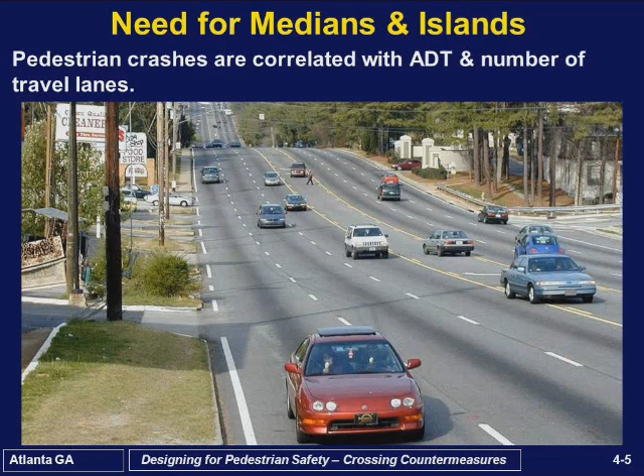When we talk about pedestrians crossing streets, one of the things that we know from the research is that pedestrian crashes are directly related to higher volumes of motor vehicle traffic and numbers of travel lanes. So the higher volume wide streets are the ones where we often find overrepresentation of pedestrian crashes, deaths, and injuries. So these are the kinds of roadways that lend themselves to really needing some effective solutions and treatments to improve safety.

So the definition of medians and median islands, essentially we're talking about a median as being an area in the middle of the roadway separating opposing lanes of traffic, excluding the turn lanes, and they can generally be either pavement marking only or what we call raised medians or islands that have curbing, and they do separate the movement of motor vehicle traffic. Refuge islands are generally shorter sections of medians.

They are referred to as center islands, refuge islands, pedestrian islands, median slow points. They have a variety of names. But generally, here we refer to raised islands that are placed in the middle of the street, so pedestrians have a place of refuge between opposing directions of motor vehicles.

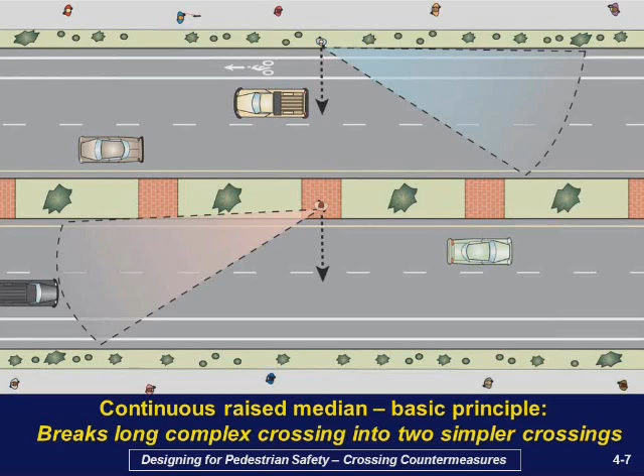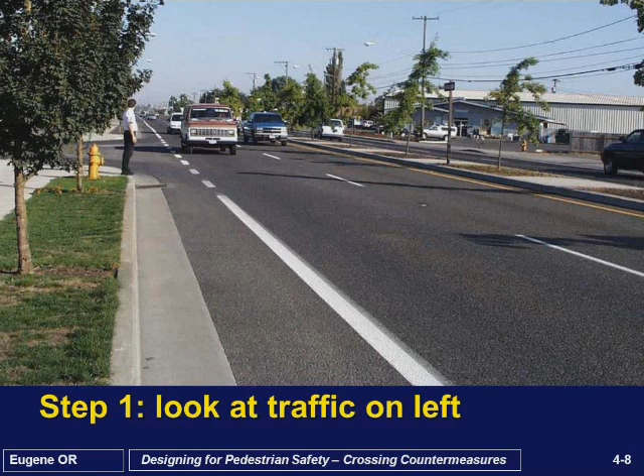So when you look at a complex crossing for a pedestrian, you have a multi-lane roadway. Here you have 4 lanes of traffic, 2 in each direction. Providing a median in the middle of the street sort of breaks up that crossing maneuver into 2 distinct crossings. So a pedestrian in this case would be able to negotiate each direction of traffic at a single time. So you can see here a pedestrian stopping at the curb would look to the left, wait for a gap in traffic or wait for traffic to yield.

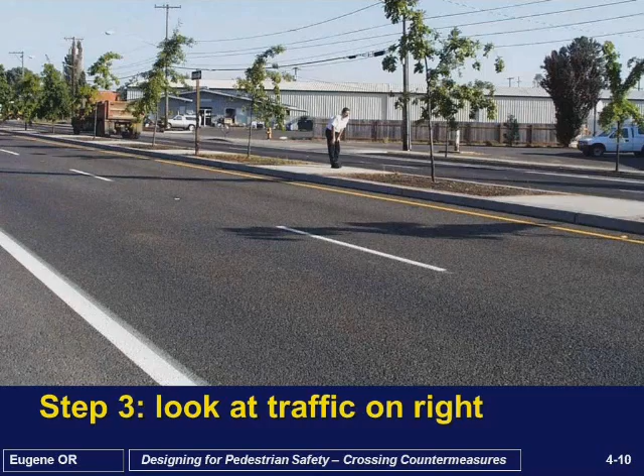The pedestrian would then cross to the first half of the street and then wait in the middle or in the median, in this case a raised median, to wait until it's safe to cross the second half of the street, and then the pedestrian completes the crossing. So when you have a section of roadway, a high volume multi-lane roadway where pedestrians are being struck or there's high risks, placing a raised median along that section really allows pedestrians to kind of figure out how to cross in a safer manner compared to only having a wide open roadway with no raised median.

There are several items of guidance that we have from the Federal Highway Administration on medians and median islands. And one of them says that medians should be considered on curbed sections of roadway, on multi-lane roads in urban and suburban areas, and they're particularly beneficial on roads with traffic volumes, average daily traffic, of about 12,000 vehicles a day or more, and or where the vehicle speeds are fairly high.

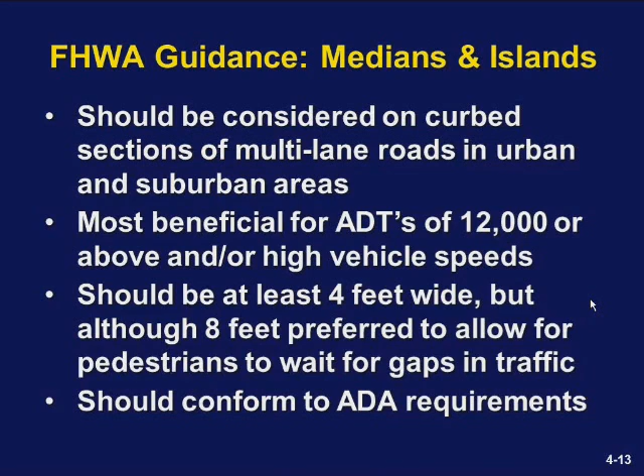Now, in terms of guidance for the width of raised medians, an absolute minimum of 4 feet, although FHWA guidance and also the AASHTO pedestrian guide recommend wider medians. 8 feet is preferred or wider. 6 feet is certainly better than 4, but we want to have enough room for several pedestrians to be waiting in the median or people in wheelchairs to have room so they're not sticking out in the travel lane. And the medians also need to conform to ADA requirements.

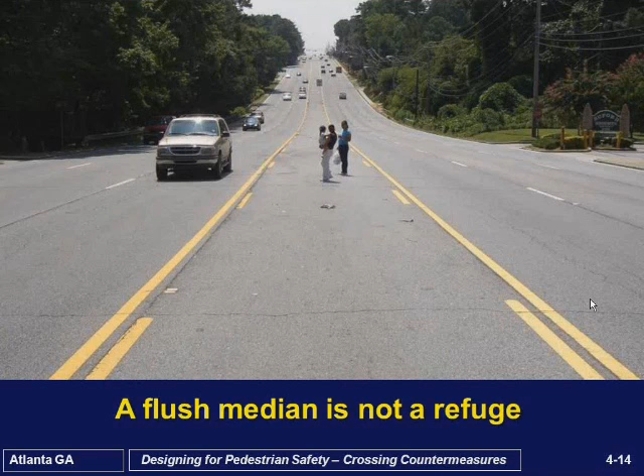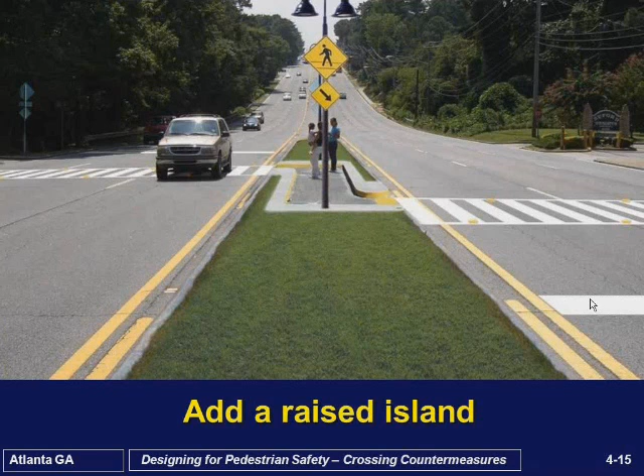Okay, so if we look at a roadway like this, in this case a 5-lane roadway, and pedestrians are trying to cross, and here several pedestrians are waiting in the middle of the street, this really does not provide them a very good place of refuge. That does not provide a protective area for pedestrians. So providing a raised median, like hopefully you can see now, is a much better alternative for them. And now this situation has added a marked crosswalk and an angled crossing. We're going to talk more about that in a minute.

And here you can see an illustration of that where they actually have a curb extension on each side of the street connecting a marked crosswalk, and then sort of an angled turn for the pedestrian in the middle of the street, and then they can complete their crossing. There's overhead lighting on this crossing as well.

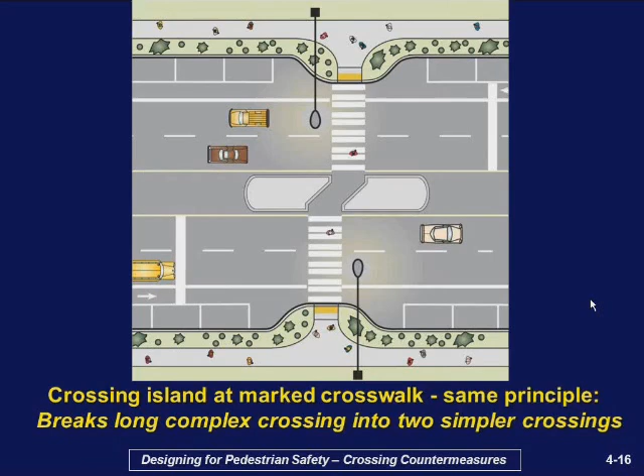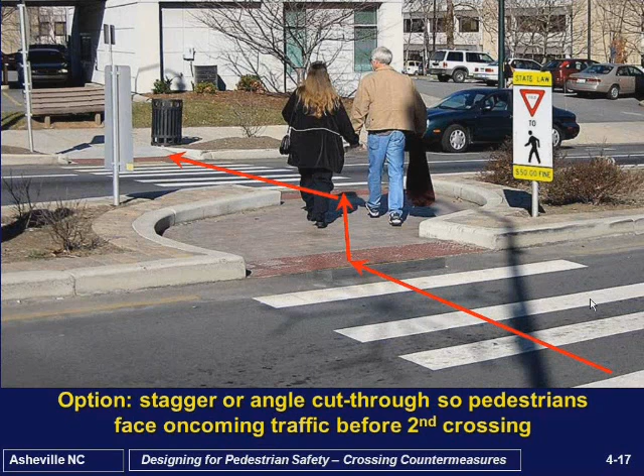Now, some agencies have started putting in kind of a stagger to the right, where they have a marked crosswalk and then a raised median with a little stagger to the right to allow pedestrians or encourage them to be looking for oncoming traffic from their right when they're in the middle of the street, to help reduce the chance of them stepping out into the path of an oncoming vehicle coming from the second half of the street.

So just to summarize very quickly, why do medians reduce pedestrian crashes? Because they break up a complex crossing on a multi-lane roadway into two simpler crossing steps. What's the crash reduction factor for adding raised medians? Most of you know what crash reduction factors are. That's basically the percentage of expected reduction in pedestrian crashes. So at a marked crosswalk, the CRF is about 46%. At an unmarked crosswalk, the CRF is about 39%.

Now there's something else we put up there called the CMF. That's the crash modification factor, and that's the terminology more recently used, like in the Highway Safety Manual. So if you're at a marked crosswalk, having pedestrian crashes along the route, and you add a raised median or median island, you might expect to reduce about 46% of the crashes, and the inverse of that is a CMF of 0.54. So it's just a different way of expressing the same information.

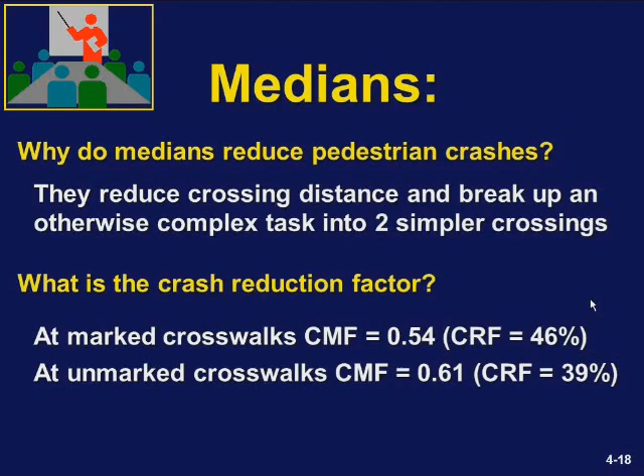Okay, so here's an example of the use of a raised median. This is along a suburban roadway in Bellevue, Washington, at a bus stop location. They have incorporated a raised median with a traffic signal, pedestrian signals, and a marked crosswalk. A pedestrian would push the button, and it would give traffic a red light coming from the pedestrian's left. The pedestrian would proceed to cross to the median while traffic is stopped to their left, and meanwhile traffic from the right continues to move forward.

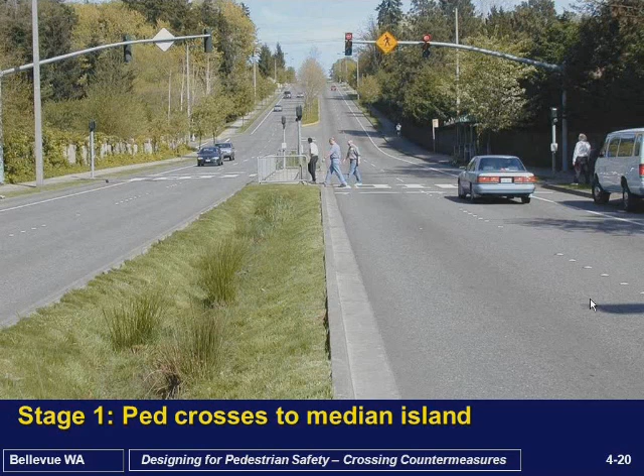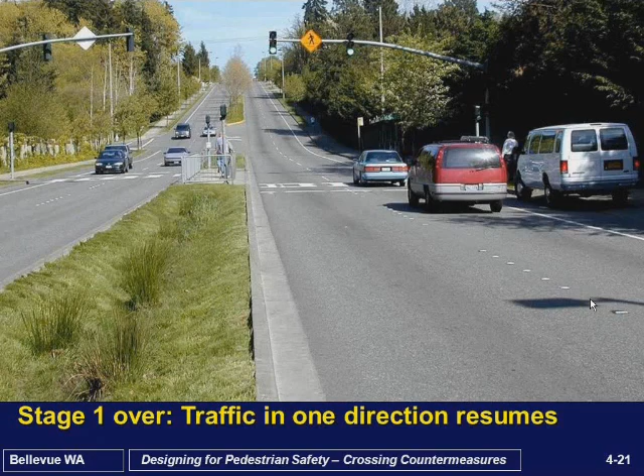The pedestrian would then be walking to the right to get to a push button in the median, and then traffic would be released in the first direction. You can see the green light there for motorists. Meanwhile, traffic coming from the second direction continues to flow until the pedestrian pushes the button right there at the end of their little walk area. Then traffic would stop coming from the pedestrian's right, and pedestrians can cross safely to the other side. So it really breaks up the crossing into two steps.

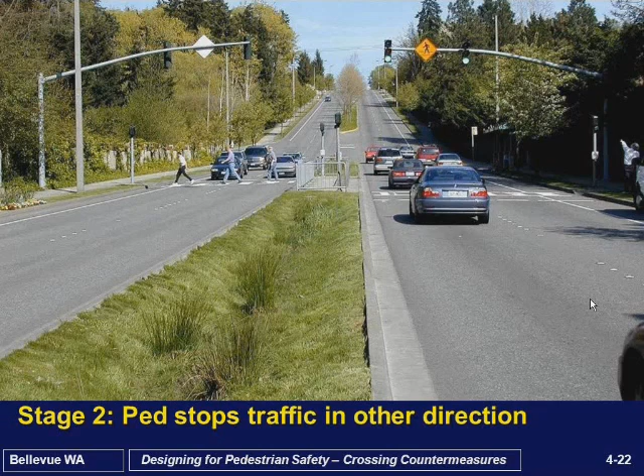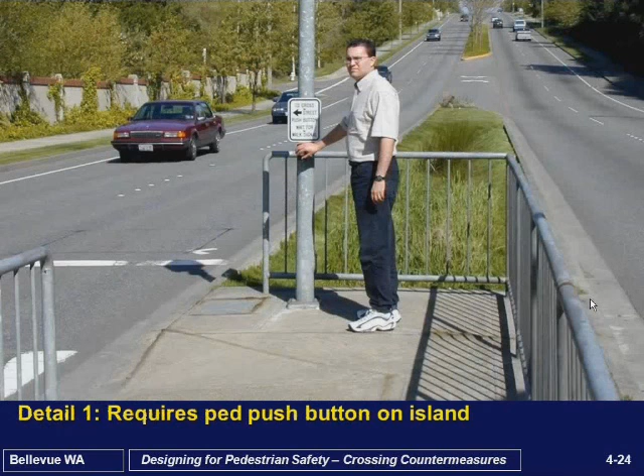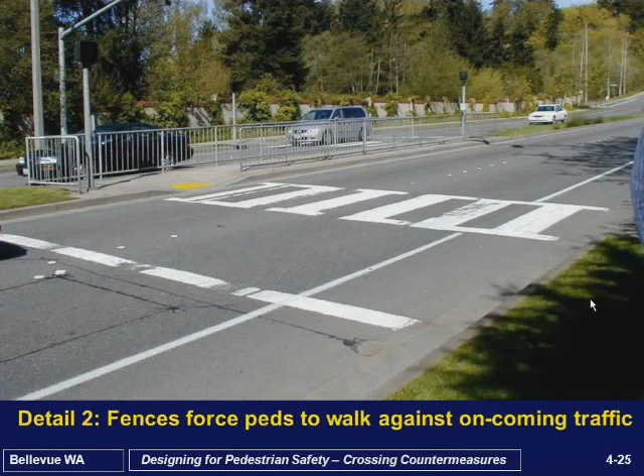It minimizes delay to motorists as well as pedestrian delay, and provides an area of refuge so pedestrians can make the maneuver, with the benefit of the traffic signal and pedestrian signals as well. Again, you can see traffic resumes in both directions. One important detail is that it requires a pedestrian push button at the end of the island, so pedestrians can activate the red light for motorists coming to their right. It also requires fencing, so pedestrians have an area to queue up in the median and walk to the right so they can see oncoming traffic and get to the push button to stop traffic in the second direction.

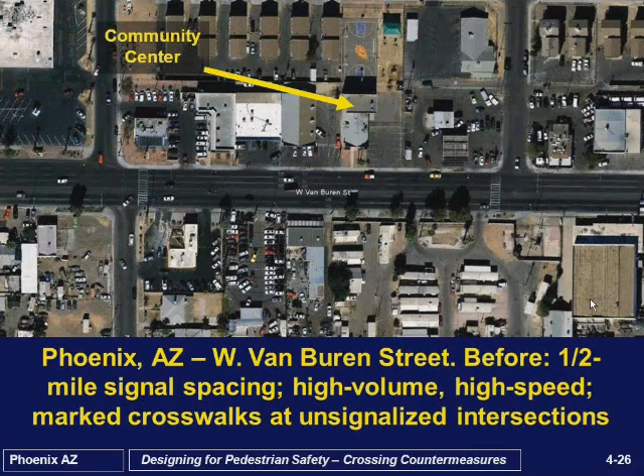I'm going to give you an example of one situation in Phoenix, Arizona, on West Van Buren Street. It was a long corridor with traffic signals spaced about a half mile apart. Pedestrians were being struck crossing the street here. It's a 6-lane roadway, high volume, high speed. There was a marked crosswalk at an unsignalized location. You can see it's just no frills, just paint on the road, a ladder-style crosswalk. It's at an intersection, and pedestrians were having difficulty crossing the street, as you might imagine.

You can look at this illustration of what the pedestrian would see crossing over to a community center, crossing 6 lanes of traffic. So the engineers here decided to implement a combination of treatments. Here you can see a raised median island with high visibility marked crosswalks, and the stagger built into the median itself with the fencing, just like we showed you in the other illustration. So this is the after condition they built to help pedestrians get more safely across the street.

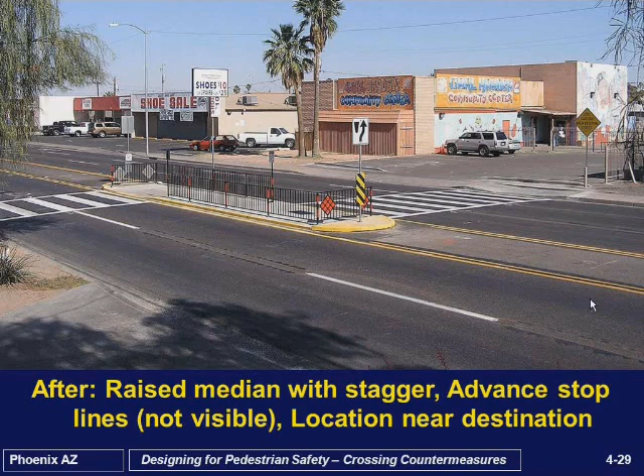Okay, now just to summarize some of the things that we know about median islands from the research and other guidelines is they can result in pedestrian crashes being reduced by 39 to 46% roughly. They tend to decrease pedestrian delay by up to 30%, but they can increase motorist delay in situations where you have an extended median and motorists have to make additional turns to get into the side streets or driveways. So I'm not going to get too much into that, but there is somewhat of a balance. We want to, again, focus on overall safety.

And I will say that in addition to reducing pedestrian crashes, some studies have also showed that having a divided roadway, like with raised median islands, results in an overall reduction in total vehicle crashes compared to undivided roadways. So we know that raised medians in particular can benefit safety for essentially all road users, motorists as well as pedestrians. And we know that raised medians can enhance visibility of pedestrians because they have a place to stand in the street and they can more easily see motorists coming in the second direction. Motorists can more easily see them.

They can reduce vehicle speeds on certain routes and do provide access management. We're not going to get into it in this presentation, but also in terms of reducing crashes involving driveways, the raised medians can help there. And they also provide space for signing that's appropriate for the roadway itself.

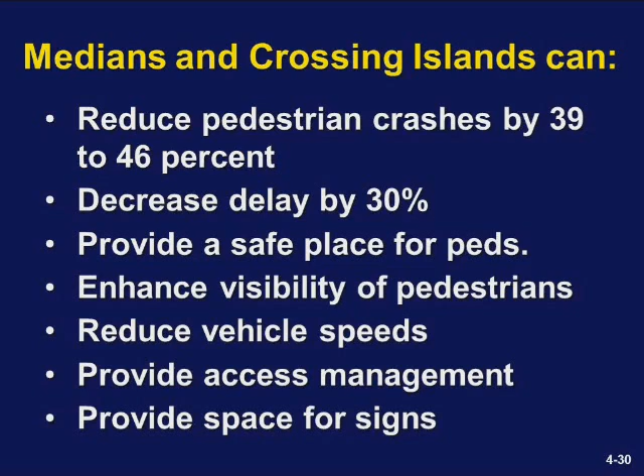Good morning. This is Sheila Lyons. I'm with the Oregon Department of Transportation. I manage the Pedestrian and Bicycle Program, and we have taken Dr. Zegeer's research and run with it, and to great effect. And I'm going to talk about mainly two types of pedestrian islands that we use: pedestrian crossing islands and pork chop islands. And I'm going to start with pedestrian crossing islands.

This is the study that I think kind of started looking at how pedestrians cross the street. It was published in 2005, and it's been a really great resource on basically what are the effects of marking a crosswalk, and when should you consider other measures, or maybe not marking the crosswalk at all. And a little bit of this is a repeat because, of course, Dr. Zegeer is the one that did the research and he just gave the prior presentation. But the correlate with crashes is the motor vehicle traffic volume, represented by the average daily traffic, which is what ADT means, and the number of travel lanes. And this has been confirmed by the observations we've made in Oregon on our state highways.

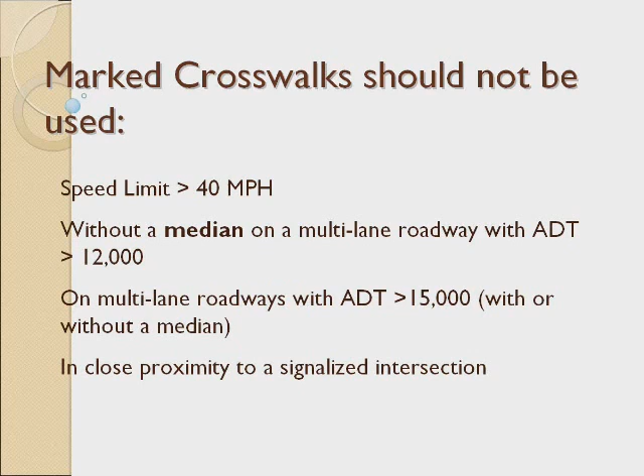So the guidance is that a marked crosswalk should not be used above a 40-mile-per-hour speed limit, without a median on a multi-lane roadway with ADTs above 12,000, or on multi-lane roadways with ADTs above 15,000, regardless of the other amenities that you have. And then, of course, you don't want to put them in close proximity to a signalized intersection, because you would want to direct the pedestrian to the signalized intersection.

The following treatments are recommended: median islands on multi-lane roads. Of course, if you have ped volumes that warrant a traffic signal or another type of pedestrian hybrid beacon or rectangular rapid flashing beacon. Crossing median islands reduce the crossing exposure. Curb extensions are another method to reduce the crossing width. And then, of course, you can also look at your roadway design. Often streets were just striped out for however many travel lanes fit in the physical space without much consideration for other modes of traffic, and there's a lot of opportunity to restripe for fewer numbers of travel lanes.

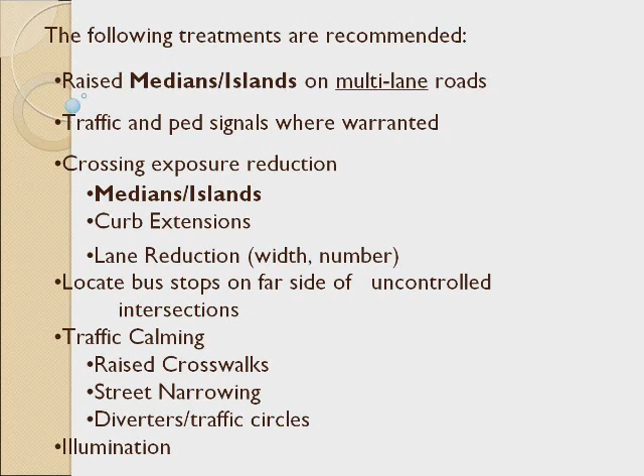We like to locate the crossings with bus stops, and preferably on the far side of an uncontrolled intersection. And then there are other types of traffic calming measures like raised crosswalks, street narrowing, diverters, and illumination. And this is all the recommendations out of Dr. Zegeer's 2005 report. So the message here is that medians are the message, and that they reduce crash risk significantly, particularly on higher volume roadways, higher ADT roadways, and of course it needs to be a raised median.

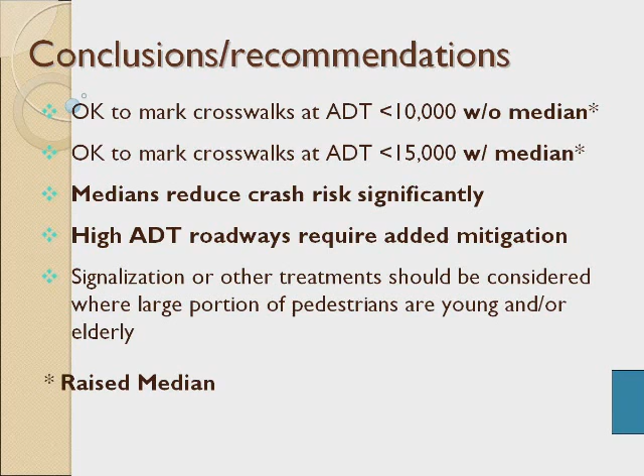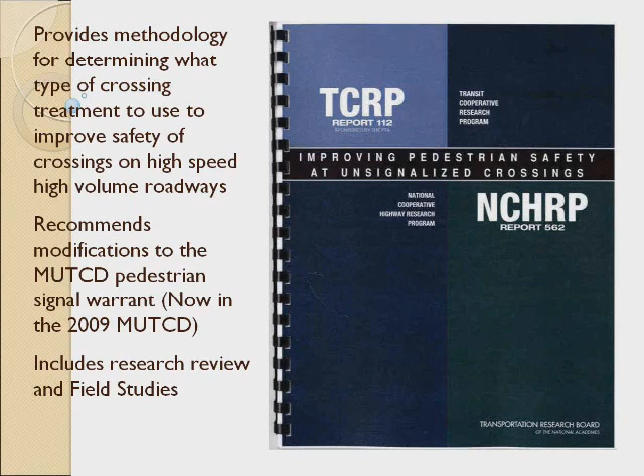So we use the 2005 Zegeer report in conjunction with this report, which I like to refer to as NCHRP 562, which basically looked at what kind of stopping compliance you get at different types of crossing amenities. And they studied everything from just the median alone to various flashing signal treatments. And this report is a little bit technical. It's not been really translated into English so much. You have to read between the lines, but you can kind of ferret out whether you need a red signal indication or a yellow signal indication. So we've taken all this research and we've adopted it into our traffic manual.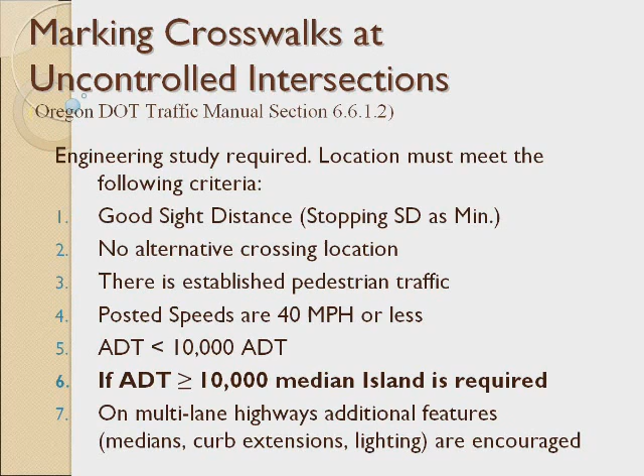And this is the guidance from the Oregon Traffic Manual. You'll see that we basically have some common sense approaches plus the Zegeer research, which says that if you want a marked crosswalk at an uncontrolled location, you have to have posted speeds less than 40 miles per hour. We've ratcheted down the research a little bit to 10,000 ADT. And if it's above 10,000 ADT, then we require a median because that is the safety feature. And we found that there's a lot of benefits to that.

So we also have adopted a very similar approach to mid-block locations. And contrary to, I think, popular belief that crossing mid-block is problematic, we've found that it actually can be an easier crossing maneuver for pedestrians. And sometimes you can get a better crossing if you look at a mid-block location.

In Oregon, we do not have a jaywalking law, so it is legal to cross mid-block. If it's a marked crosswalk, then the motor vehicle driver yields to the pedestrian. If it's an unmarked crosswalk or an unmarked crossing, then the pedestrian must yield to motor vehicle traffic, but there is no restriction on where the pedestrian can cross. And we've been having some good success with mid-block locations.

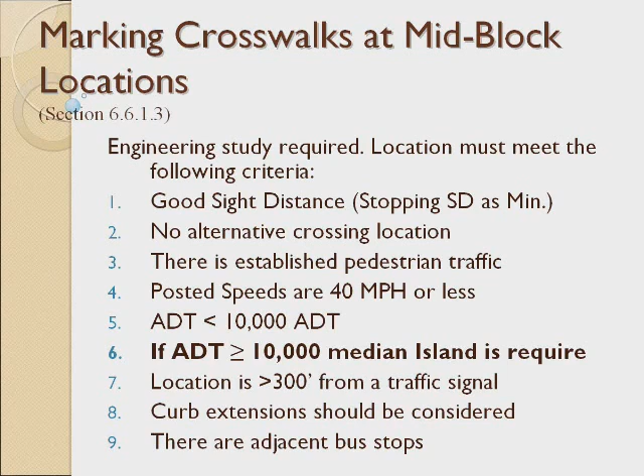So when you do a good enhanced pedestrian crossing, it is an opportunity to concentrate. In a corridor where you have diffuse pedestrian generators, you can't tell where the pedestrian is going to cross. You provide a good pedestrian crossing and pedestrians will be attracted to it, and you'll get the vast majority of your crossings happening at that location. And then you have to look at other things like free turn movements on and off the roadway and other traffic characteristics that might make crossing problematic for pedestrians.

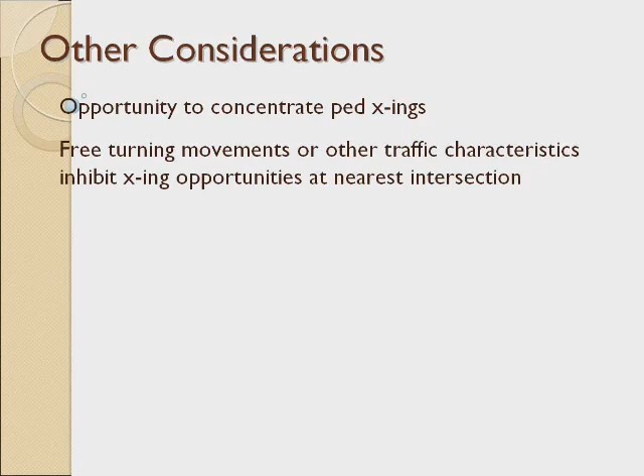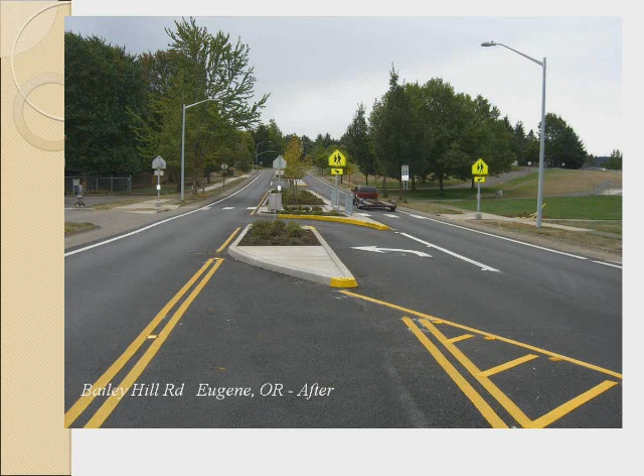And then we also have examples on just rural 2-lane roadways. This was 2 lanes with a 2-way center turn lane, and we used that opportunity there to put in a median island. Again, this one has flasher treatments, but really it's the median that is the safety feature. So that is the condition.

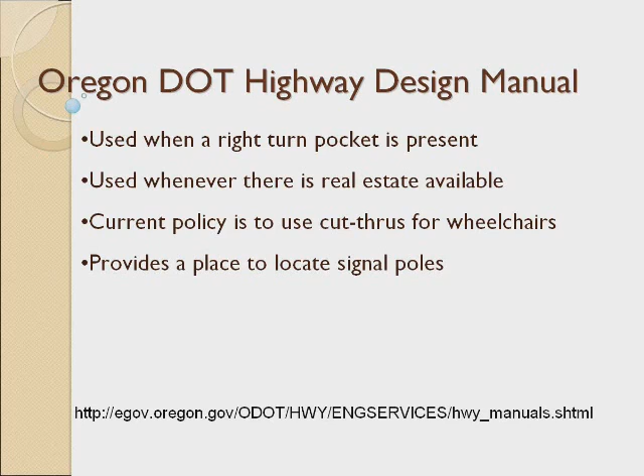We also use pork chop islands. We use them mainly when a right turn pocket is present. Wherever there's real estate available, we use cut-throughs for wheelchairs. And it turns out that we have a lot of support from the signal folks because it's good real estate for them to place their signal poles, and it makes for shorter mast arms and better signal pole placement.

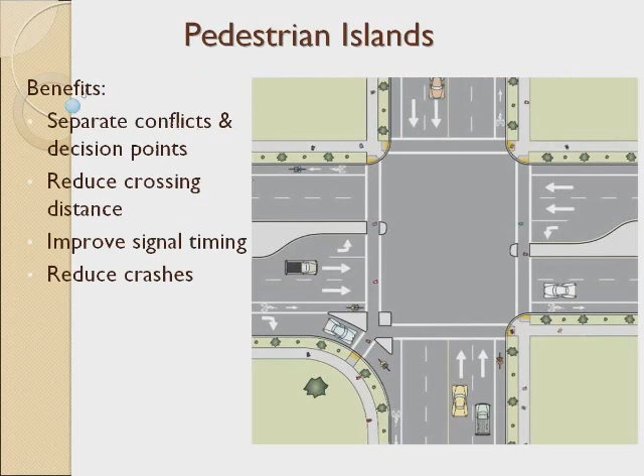Again, it separates the conflicts, it reduces the crossing distance, it improves the signal timing, and does reduce crashes at pork chop islands. And you can imagine what some of the signal timing would have to be like without that. How long would these pedestrian crossings be? How long would the pedestrian phase be? There would be quite a bit of delay for the motor vehicle traffic as well.

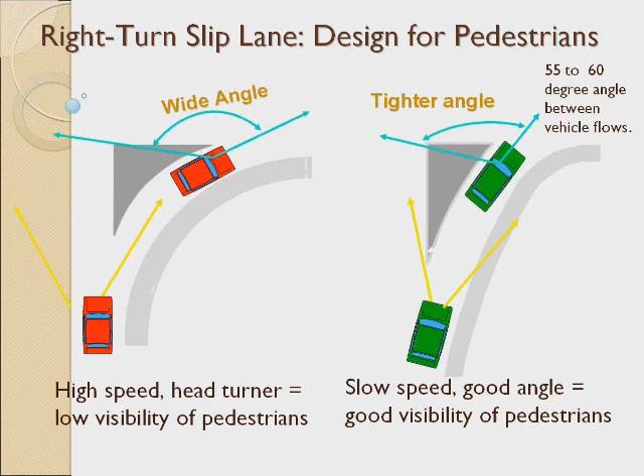Design is important. You want to create as much of a 90-degree angle as you can, or get as close to that. You can't get a 90-degree angle, but you want to have a less acute angle so that you line up the motor vehicle driver to not have to turn all the way around behind them to merge into traffic. It also improves their visibility of the pedestrian crossing.

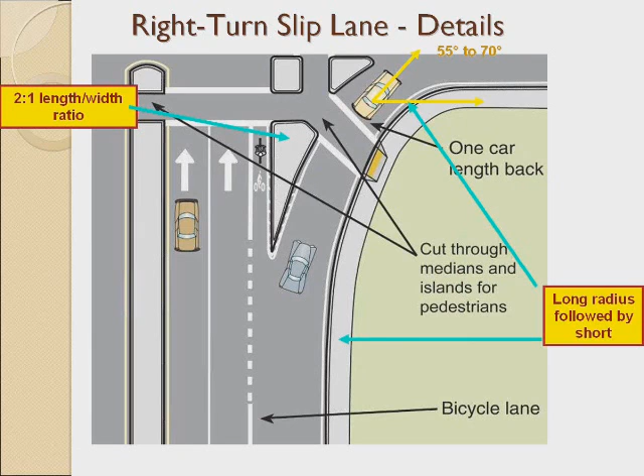We like to make them 2 times the width. The length should be 2 times the width, and we use cut-throughs for wheelchair access. And then if you just, on a snowy day, go out and look, you can see that these pork chop islands just present themselves. And notice that the design is exactly as I've described. It's about 2 times long.

The length is 2 times the width. It's kind of a natural bit of real estate that's available for a median island. You don't get a lot of pushback from the roadway designers for them. So then the question becomes, should you mark the crosswalk?

If you place a pork chop island, that's an opportunity to not signalize the right turn movement. You can have a right turn lane without signalization. And it's not a burden on pedestrians to cross that because the sight lines are good, motor vehicles can see the pedestrian, and the question is, should you mark it? The MUTCD does advise marking it. So in Oregon, we tend to interpret this as an opportunity to mark it, and we tend to mark it.

And then here's some examples. This is in Bend, Oregon, and it's an opportunity, you can put landscaping. They chose rocks here. Notice we have a cut-through. We have a ped push button available on the island. The crossing of the right turn lane is not signalized, but once you get to the pork chop, you have to activate the pedestrian walk phase. And then wheelchair access is facilitated with cut-throughs.

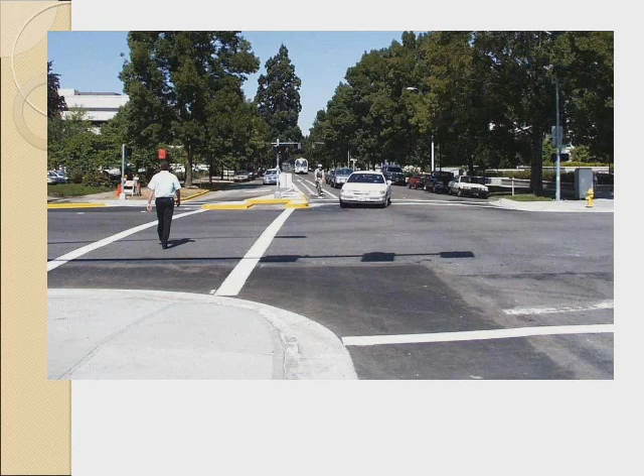And then again, it just provides crossing assistance to people of all stripes. And this is the end of my presentation, and that's the world's tallest man on a bicycle.

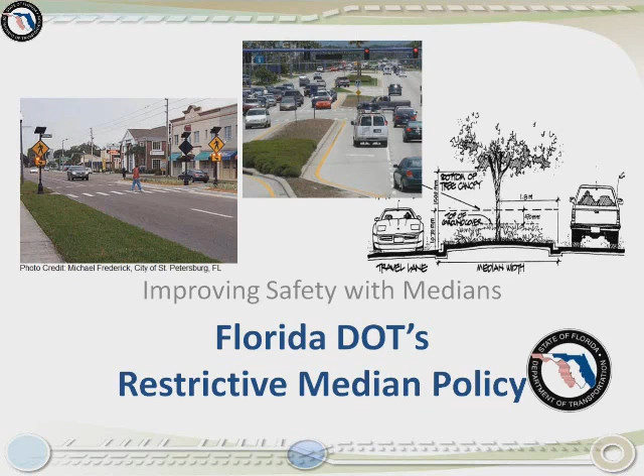So in 1993, our design section created a policy that essentially said any new multi-lane project with a design speed over 40 miles per hour will be designed to have a restrictive median. And just as importantly, in my opinion, the second part of the policy was that it would encourage the use of small restrictive medians like the kinds that you've seen already from the first two presentations, even where we do have, let's say, a five-lane design type thing. So that is what has been in place since 1993.

It has now been moved into our standard plans preparation manual. At the end of the presentation, almost everything that I mentioned will have a hot link to it, and so there you see what the median policy is.

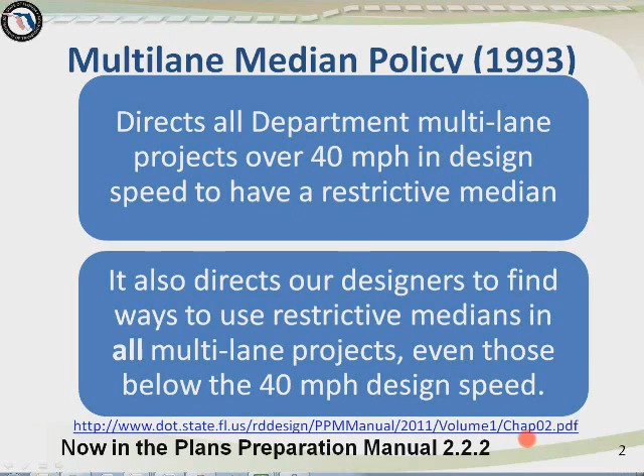So what led to our policy? A number of studies and past work has shown that wherever restrictive medians have been put in, the crash rate goes down. And what I'm going to be speaking of generally will be automobile vehicle crash rates.

Back in 1993, the University of Florida did this study comparing urban multi-lane highways. So we would compare the same kinds of highways only during the day, and found a significant decrease in the crash rate between the center turn lane versus those with the raised median.

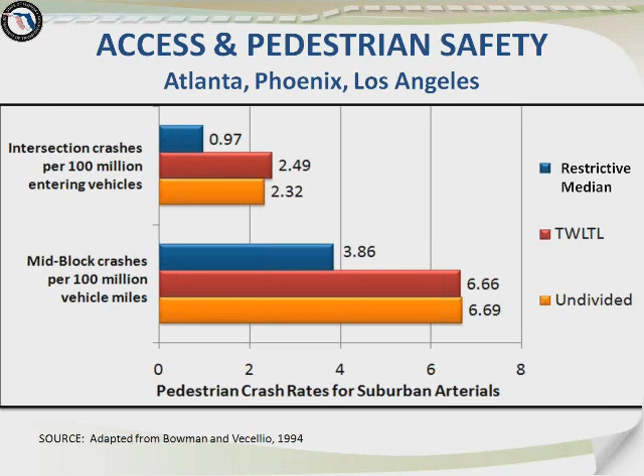Here in Tallahassee, also probably back in the year 2002, the city traffic engineer, Debbie Danton, really had a great effort to try and put restrictive median in on Apalachee Parkway. And she used a series of photos taken from a light pole to show the city council people some of the issues here. And you can see this is pretty scary.

And the thing that I think we talked about earlier is how the median is the safety feature. And one of the reasons it is the safety feature is not just because it's big, and not just because it's off the ground, but because of its size. It is visible to the driver, whereas a pedestrian is invisible to, let's just say, 10% of these people.

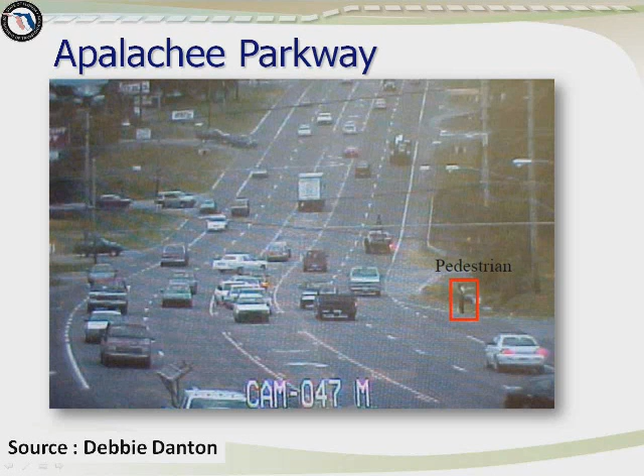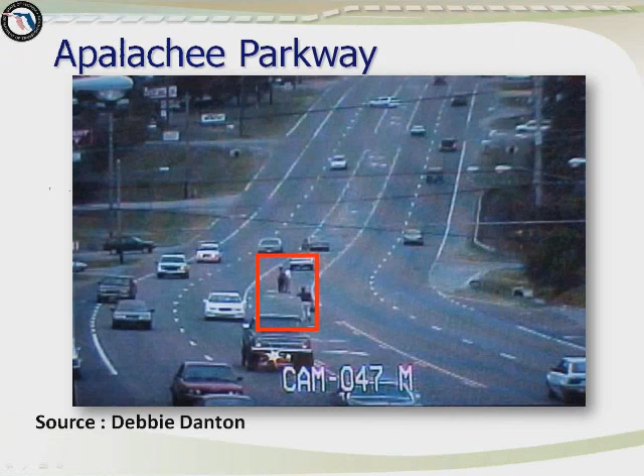And this is a place where there were a number of pedestrian crashes, so people on our commission in the city could say, well, yeah, I know what it's like over there, and it really helped. So you see the series of photos really helped convince our leaders to put a median in. And there's what it looks like today. That was back in 2002, and now this is what it looks like today.

So what was interesting to me is that our Secretary of Transportation has come to our section frequently to say, look, I get a lot of complaints from businesses when we put in medians, and I try to explain that this is for safety purposes. And as a matter of fact, from our Secretary's office, you can see Apalachee Parkway. He knew that we were working on a study of these kinds of roadways and asked if we could speed up the portion on Apalachee Parkway so he could have the data in his office, where he sometimes gets these complaints from some of the business interests.

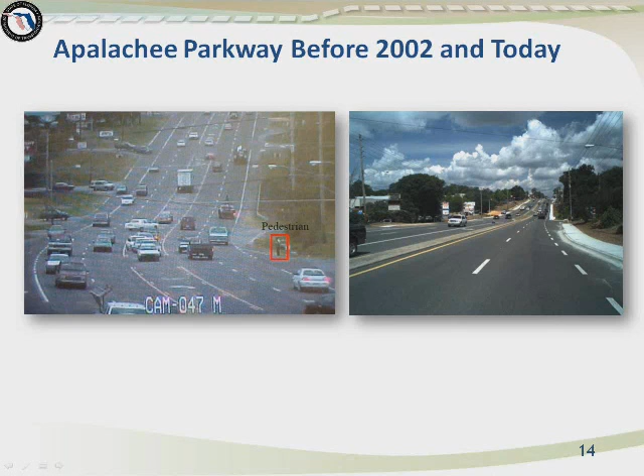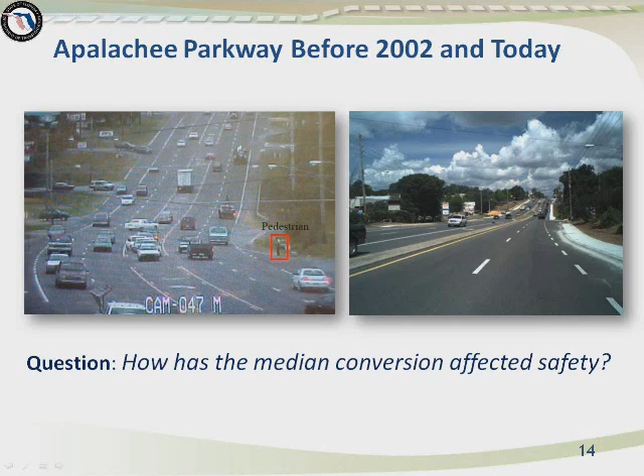So we've been working with Florida International University in South Florida to see the difference in our multi-lane highways where we actually put a median in, before and after studies all over the state. So the first thing we did was Apalachee Parkway, and this is what we found. This is 1983 to 2010. You see a big drop in 1991. We found out that had something to do more with the crash reporting standards, which became more stringent. In other words, it had to be property damage over a certain amount or bodily injury.

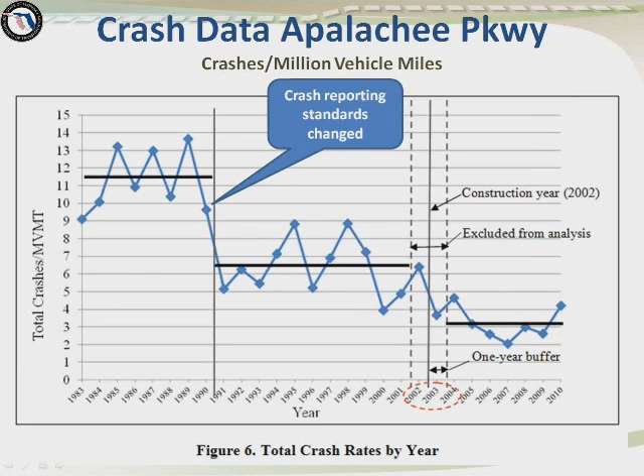This is the period of construction, 2002 to 2004, and you can see the drop that has happened, and it is because of the median, because certain other crashes, wet crashes and nighttime crashes, had been removed, so we could try to get a better indication of what caused the decrease in the crash rate. Again, speaking about vehicle crashes. Okay, this is just a blow-up of that.

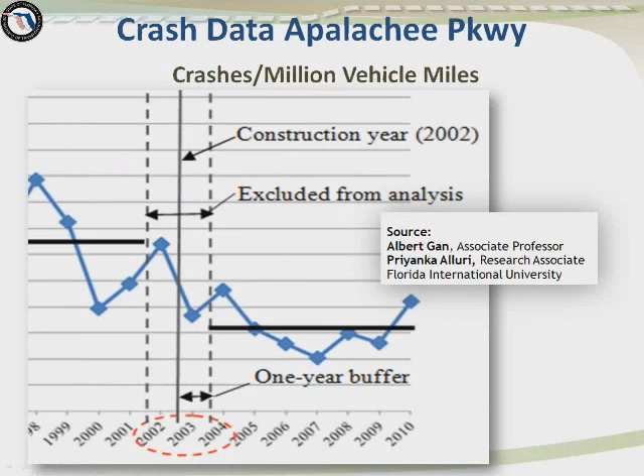Now, those of you that have started working with the Highway Safety Manual understand that medians are one of the most effective ways to increase safety. And so how come we're not building more of them? Well, controversies with existing businesses is a big issue and something that has to be dealt with. And there seems to be a real resistance to U-turns. Okay?

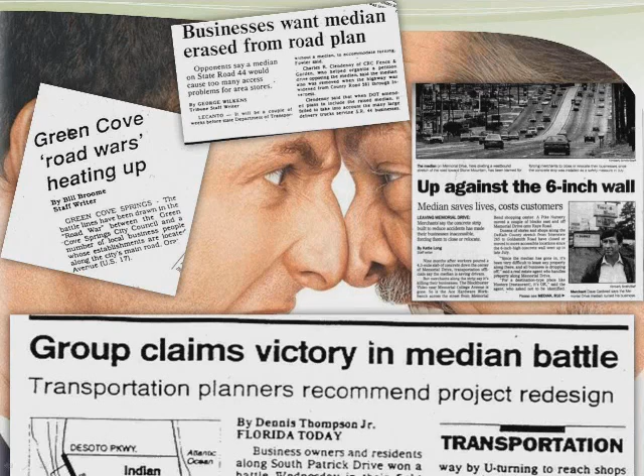Just because you have the right to put a median down a roadway, and just because it's the right thing to do, you cannot just act like it. You really need to be very sensitive, and you really need to do your work in order to become successful. So what we've done in the past few years is we've really worked on our materials that we have on public relations, and we've also worked significantly on the issues of things like U-turns. And I'll get more into that later.

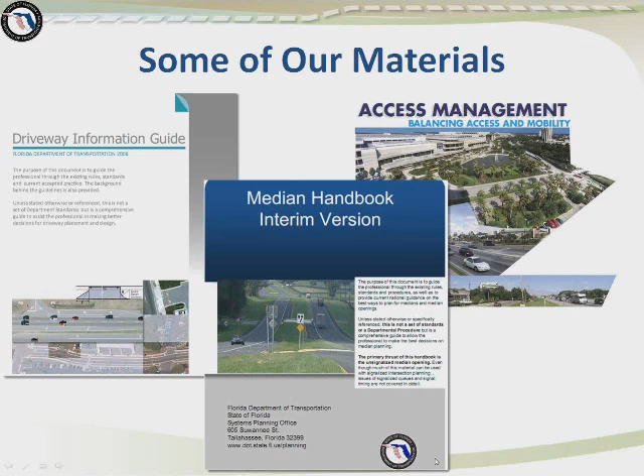So in addition to some of the materials that we have for the public, we've also created materials for our own professionals. Traffic engineers and transportation professionals usually become specialists at something, and many times are thrust into defending decisions that were made by specialists of another field. So we tried to put out documents and training that help the non-specialist professional understand the principles behind good access management and good median design. And that's why we have created the median handbook and the driveway information guide.

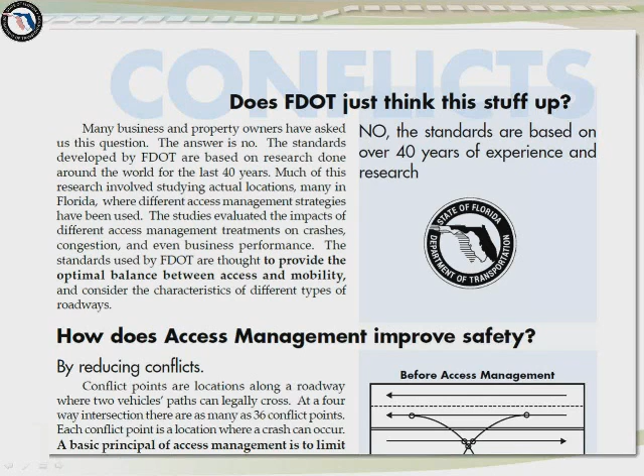This is just one of the pages of one of the pamphlets that we put together. It's a question and answer. We did it specifically from the standpoint of the businesses, and we know what kind of questions they ask because we've had a lot of experience. In our years of working, we understand what it's like to go against a hostile audience. And they have a lot of fears. Most people fear when things change, especially if they've put their lives into their businesses, and we understand that.

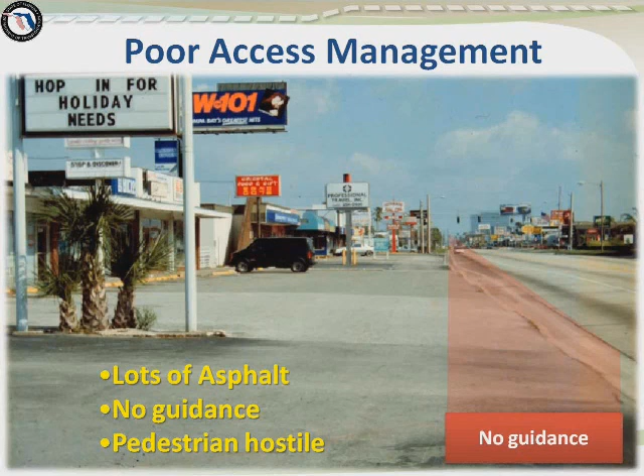Is it in a place like this with no access management, or is it a place like this, like US 192? This is near the entrance of Disney, and you should have seen what it looked like before. And from the state of business, this is a much better location to have a business.

As I said before, U-turns are just a subject that comes up every time. And we talked about it earlier, I believe, in the first presentation, where Charlie mentioned that some of the increased travel time can be traced back to these U-turns, and we've actually found that it's not so.

Yeah, it increases the travel times for those people who would desire to turn left, but the effectiveness and the safety of the bulk of the people either crossing the street or going on foot or going straight through, it really doesn't cause much of a problem.

So we had the University of South Florida in Tampa do a study that had never been done before. We wanted to know what the differences were between the movement of the direct left versus when the driver needs to make a right-hand turn followed by a U-turn to get to the same place.

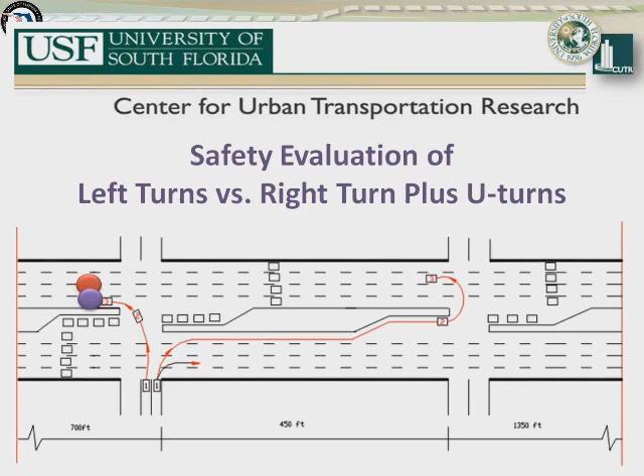And the only way to do that was by the use of video cameras placed through the entire area, and then to evaluate the data for conflicts and evasive maneuvers. So instead of waiting for crashes to happen and having to look at the crashes in the reports, what we did is on 8 corridors, we had over 300 hours of video. And we measured the evasive maneuvers.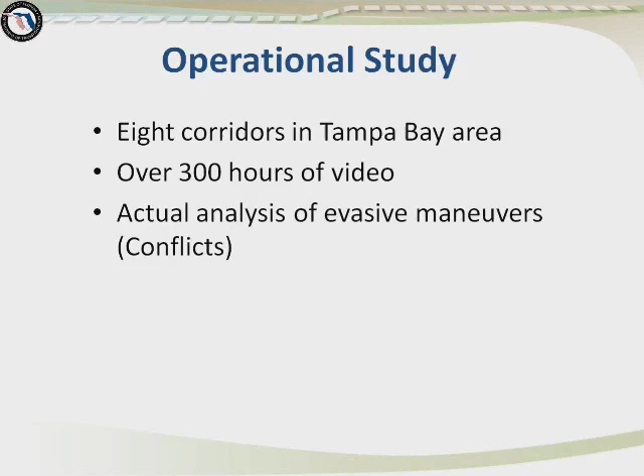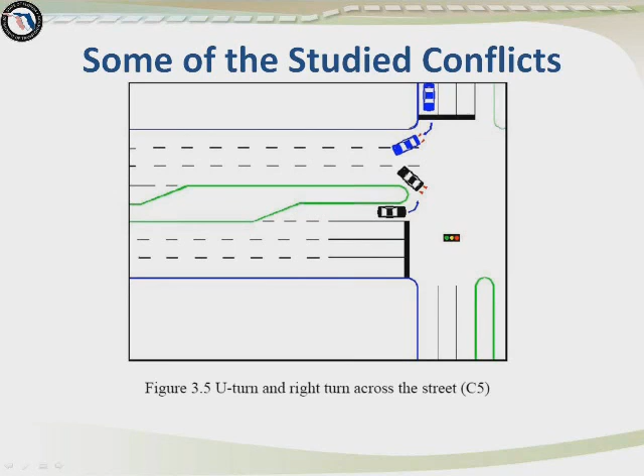Again, this is just vehicular. This is not pedestrian. And these are some of the conflicts that were studied. So, I mean, there are conflicts with U-turns. We're not just saying that they don't happen. This is a U-turn, right turn conflict, and you know that when you make a U-turn, there's sometimes a conflict with people turning right at that intersection.

Okay, but the thing to remember most of all is that the left turn out is the most dangerous of the low-speed arterial driving maneuvers you can make. And this is what we're trying to control for as much as possible. And when you do this, and you provide medians and provide well-designed directional median openings, you also improve the environment dramatically for pedestrians.

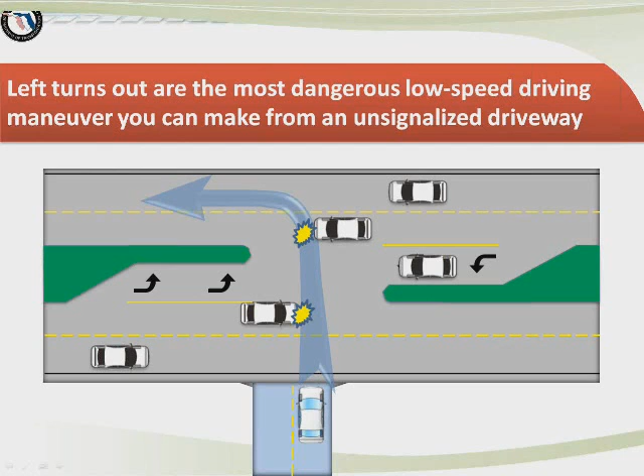So the left turn out has the problem of exposing that left turn out driver to the most dangerous crash, and that is the right angle collision. And you can see right here, the through vehicle is directly hitting a person in a car.

And that is why the right angle collision, especially of people turning out left because of their lack of visibility or the fact that somebody's behind them and making them go for a gap that they shouldn't go for, you put that all together, this is the highest potential for physical injury of a person in a vehicle, let alone a person crossing the roadway.

So we know that the pedestrian is the most vulnerable and that we need to consider them heavily in the design of these medians. Now, the work that was done by the University of South Florida showed, when they looked at the evasive maneuvers, that even though the right turn followed by the U-turn traveled a greater distance, the conflicts per thousand involved vehicles went down dramatically.

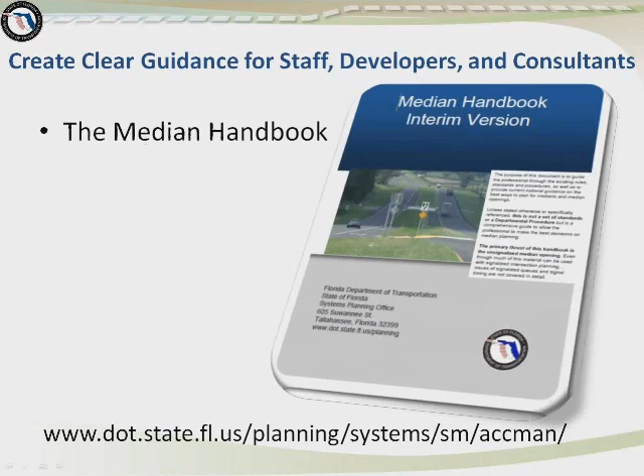Okay, so some of the things that we've dealt with to try to have a success here is to create handbooks, like we said, to create training, and every district has an access management review committee to deal with controversies as they come up, and there are plenty of them. This is the median handbook, which helps us determine where median openings go. And as you can see, safety, as put forth by everybody today, the median is the most important safety aspect of this access management design.

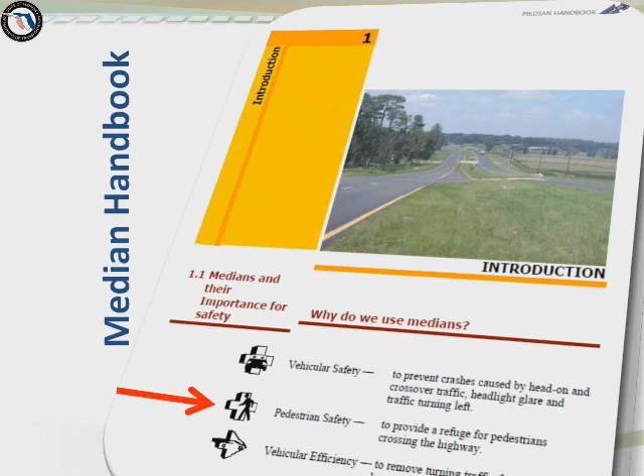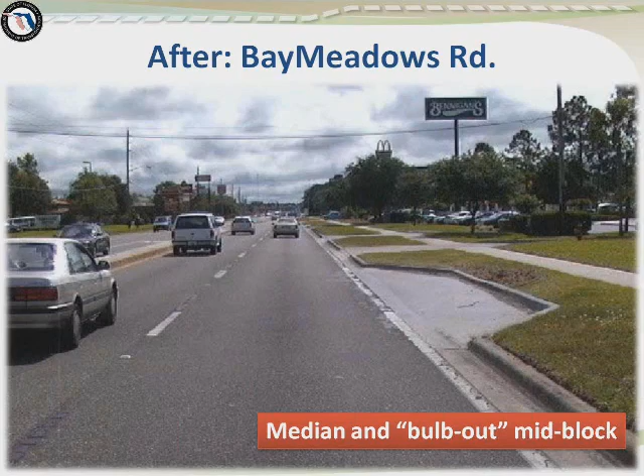Okay, we even have an entire chapter on U-turns because of what a hard sell it can be sometimes, and these are just some locations where we've had to address the extra space needed for U-turns. I've said some of these things earlier.

The concentration on these medians is safety, and even though you have the authority, don't act like you have that authority. Do be sensitive to the businesses, work with them. They actually can be good allies if you work with them. And also, if you have not already done all this, you will find people in your own agencies that are already doing good work in the field of access management and medians.

Now, as I've told you, we do come under a lot of pressure from some interests who are afraid of what the median is going to do. And as I was going through my files about a year ago, I came across an article that the Orlando Sentinel did back in 2004 that I had almost forgotten about. This is on State Road 50 through the city of Orlando and the Orlando area. The Orlando Sentinel did this article on what they considered the deadliest stretch of road in the Orlando area, which was State Road 50.

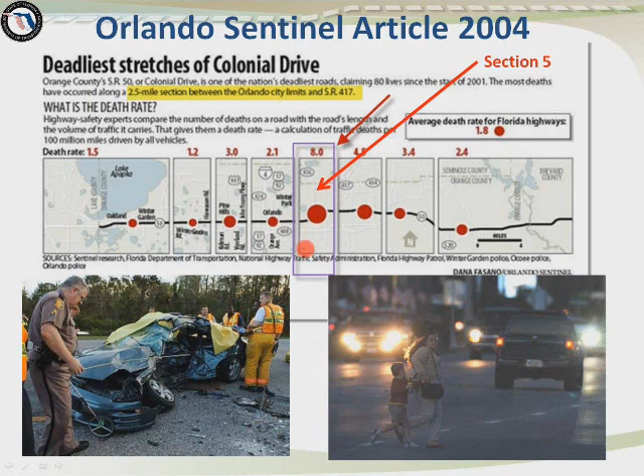They broke State Road 50 into different segments here, and they said the average death rate, per 100 million vehicle miles, is 1.8. All of these were high, but there was a portion here that actually had 8 deaths. And this, again, is pedestrian and vehicle. I know you can't see all these, but this is just a scan from the first article. Each of these red spots that you see here is a death. And here's a list of the names.

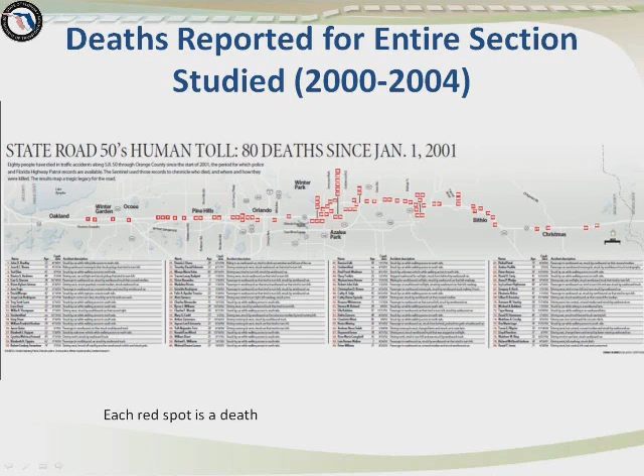And that portion that had the 8 deaths per million vehicle miles was this section that's blown up here. So each of these numbers here represents a person who died in a traffic-related incident on this small portion of road between 2000 and 2004. Now, the thing that really hit me was, again, this is not all of the people you saw in that original article, but this is starting at number 23.

I want people to see that these are real people. It has their names, their ages, and what they were doing that led to their death. And think about medians as you look at this. Tried to turn left, tried to turn left, tried to turn left. Walk across, walk across, walk across. The issue here isn't, would all of these people be alive today? Probably not. But the median definitely would have helped.

The reason we put this together is to say we're not putting these medians out there as something to speed up traffic or even something that makes the road look pretty. We're really trying to save the heartache of what you see here, and each of these people had a life. And they were doing things on the roadway that most of us do when we put ourselves in danger. So just try to keep that in mind, especially when we have to fight hard to help get a median put in to help pedestrians as well as motorists.

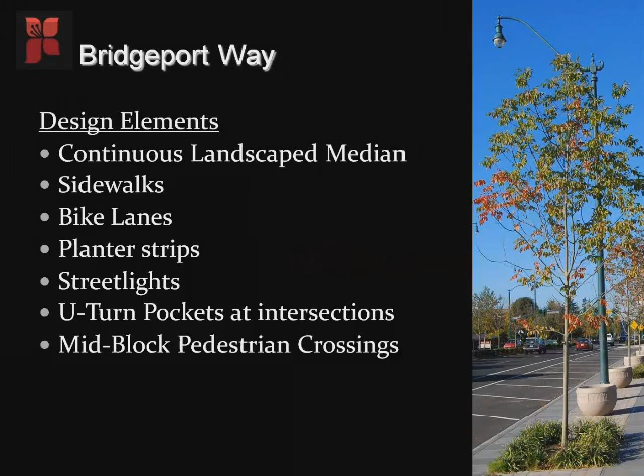When they came out with the proposal for this project, there certainly were a lot of criticisms. The highest one would be that this would certainly kill business. Everyone said, you're going to clog up access. Nobody's going to get to my business. You're just wasting money. Nobody's going to walk or bike out here anyway. All you're doing is putting money into making it look nice. And also, a fair amount of people thought that it would just be overall unsafe.

As was to be expected, we had significant results in accident reduction. Overall, a 20% reduction in accidents in the corridor and a 40% reduction in injuries. More telling, we had a lot of serious mid-block accidents, the right turn or left turn kind of movements shown in some of the other presentations, and we had a 75% reduction in mid-block accidents overall, and an 80% reduction in mid-block injuries. And one stat I don't have on this: of those mid-block injuries, we essentially eliminated any serious injuries, which is remarkable.

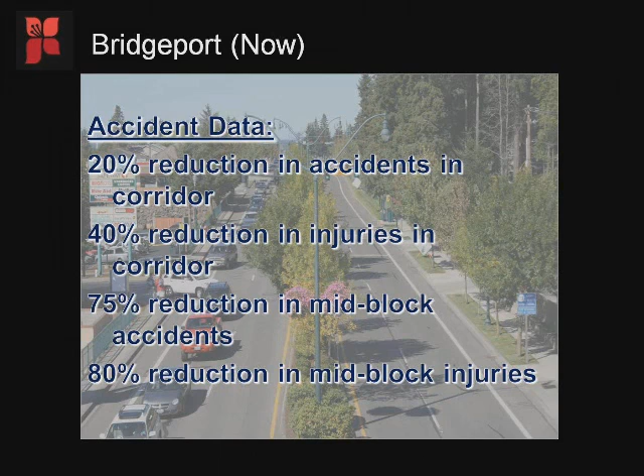Another finding: what was the result this had on local business? Because this was really our only commercial corridor in our city. As I mentioned, the primary criticism was it was going to kill business because it'd make access too difficult. But what we found was the opposite. Based on sales tax revenue data, after completion of our first phase we got over a 7% increase in sales in this corridor. And sales continued to increase even during construction of our next phase, over 5%.

And after completion of the second phase, we had an over 8% increase in sales in this area. Compare that to the rest of the area during the same time, with background sales growth of about 1%. So people actually were coming here, and really the type of place you want to go and do business is a place that's safe and inviting.

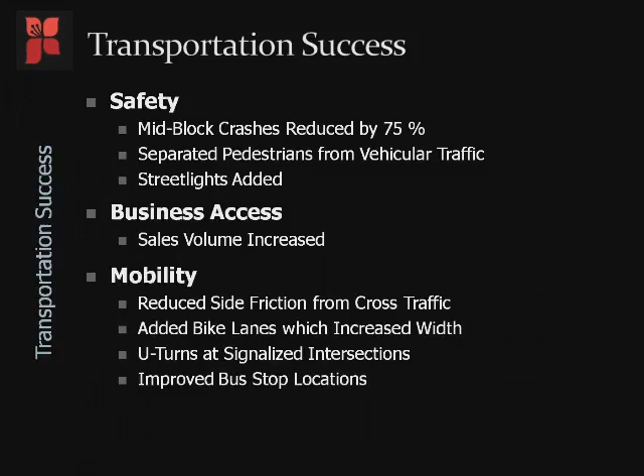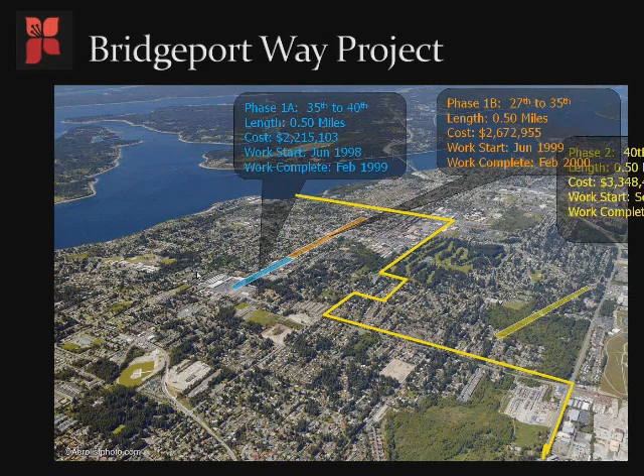One thing to say, as I mentioned, we started with the part of the road right in the middle of the city. By having success there, we were able to add on to that in subsequent phases, and we've now added about 2 miles of this. And really, the initial criticisms were all in that initial phase, and then as we moved along these other phases, the opposition and criticisms have essentially vanished.

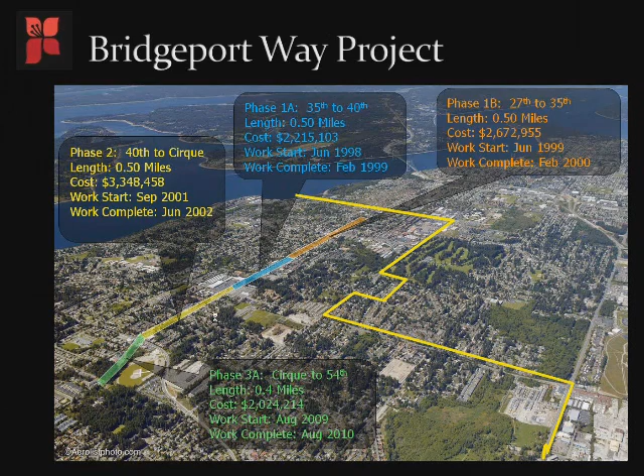Then just real briefly, the keys of our success were: have a vision for what you want for the corridor and then stick to that. Hopefully have the courage to implement these types of changes with the medians. Another important thing is pay attention to details. The aesthetics of a project go a long way at the end to community acceptance.

And then above everything else, build it, get something on the street, because the thing that will silence critics the easiest is getting a successful project out in the street to show what it can do, and then it really paves the way for more. So that is our experience in a nutshell. So I'm happy to turn it back over to Dan, and we can field some questions.